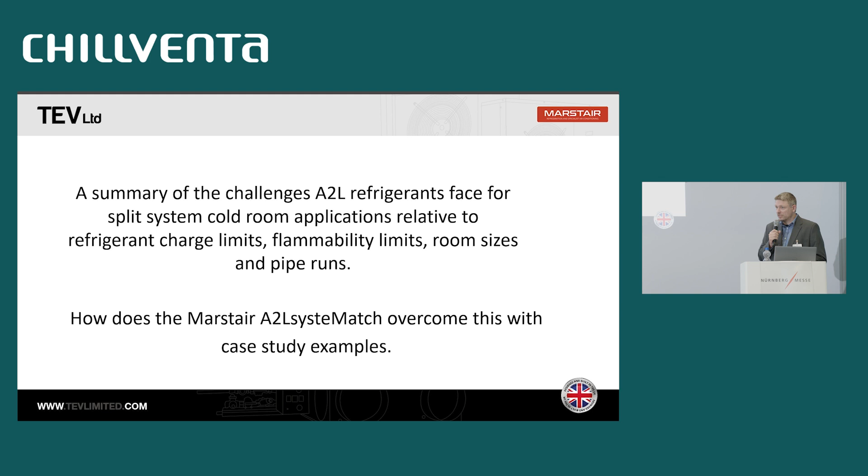Okay, so I'm going to do a bit on the F-gas regulation really quick. I'm just going to flash through it because I'm sure you're all aware of it now, but just to give a bit of background. A bit on EN 378, which is what we've used in terms of our products and safety relative to the A2Ls. What our product is and the development of it. Some case studies. A bit of total cost of ownership with environmental benefits, and a bit about our software that we have available as well.

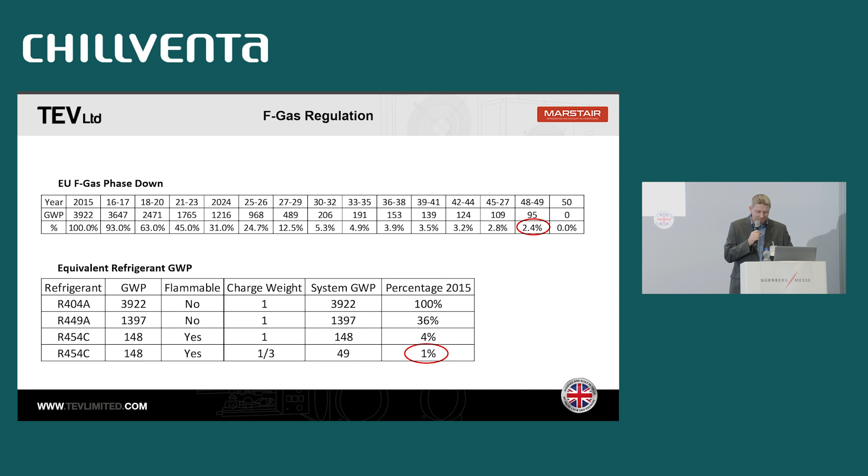Right, so the next slide is fairly complicated, so you're going to have to bear with me, okay? So what we have here is a snapshot of EN 378. And on the far left-hand side are the options in terms of what you can do for the charge limits for different refrigerants. And at the top, we can see number 1, which is charge table C2, which I'll come on to in a minute.

We've also got the second option, which is to do with sealed systems, which I'm going to talk about in a moment. We then have number 3, which is for refrigeration systems class 2 and 3, which doesn't apply to A2Ls. And then obviously we've got the 150 grams, which is kind of what you have in your domestic refrigerator, to do with the R290 that you have in there.

Now, what these caps are talking about in section 2 that I've highlighted in red is really the equivalent energy of 150 grams of R290 hydrocarbon. So it does a calculation based on what the LFL is of the individual refrigerants. So on here, we've got an example using this equation, which is M1 times 4 times the LFL, which I've highlighted.

And for 455A, that calculation comes at about 2.58 kilos. So what it's saying there is about 2.58 kilos is equivalent to about 150 grams of 290. And similar with 454C, that has a slightly lower LFL, it means about 1.7 kilos is equivalent to around about 150 grams of 290 refrigerant.

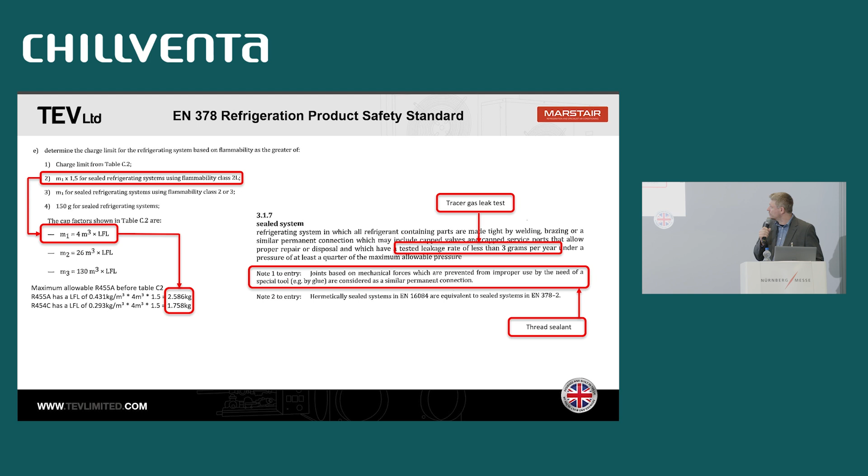Okay, now this is the separate one. This is table C2. And within table C2, if I go across it, we've got different options within EN 378. We've got the flammability class, which is 2L. Then you've got general access, which is into shops. Then you've got supervised access and authorized access. And also you've got these occupational classes. Location type 2 is for split systems. And the rule all the way down is really 20% of the LFL times the room volume.

So once you go above the limit of the 2.5 or 1.7 kilos, and you need to use more than that, that's when you have to start using the calculation in terms of what you're allowed within the room size. Just showing a little calculation on here for our 455A. The equivalent of a 30 cubic meter room. We do 20% of the LFL times 30 cubic meters. Surprisingly enough, it's exactly the same. It's 2.586 kilos. So once you go above a 30 cubic meter room, you're allowed to have more refrigerant than the 2.58.

So there's also a maximum cap. I've just taken here one of the examples, which I think is just general access. On our 455A, the 16.8 kilos is the overall maximum for general access, but you're allowed more on the authorized access. And there are other methods beyond this as well that you can use. But this is kind of the easiest method to use, so will be most generally used.

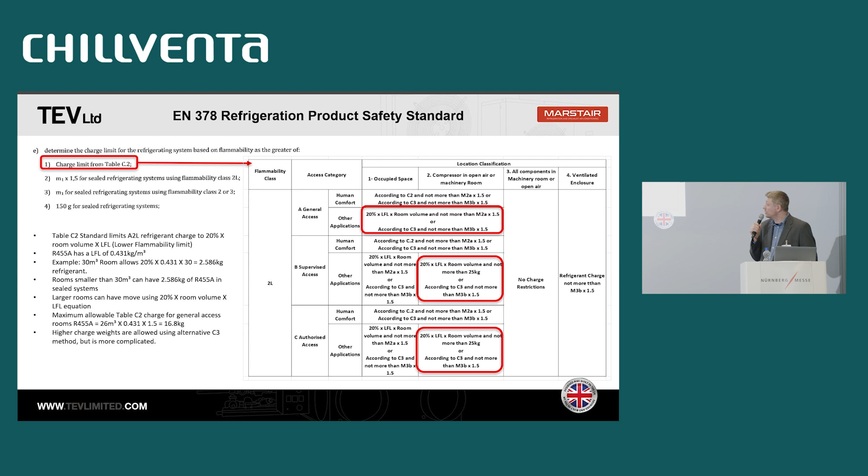Now, even saying that, if we look at the 2.5 kilos or the 1.7 kilos, it's still not a massive amount of refrigerant. Generally, if you have a split cold room system, you're generally using maybe 2-3 kilos anyway, because you'll have a receiver in the system. So how does having these caps at this level help us? And this is where we brought the SysteMatch to be an option for us. Okay, so what is the SysteMatch?

Well, basically, we're running a cold room system, but we run it very similar to an air conditioning system. So instead of having a big receiver in the system, we put a small receiver in the system. We move the expansion valve, and we put an electronic valve in the condensing unit, which means the interconnecting line becomes an expansion line like you would have in air conditioning. And then the suction line goes back as normal. We have a microchannel condenser, and in the evaporators, we try to have as small tubes as possible, again, to reduce the refrigerant charge. If we do this, you drastically reduce the amount of refrigerant.

We've got various options within the system. We do cold rooms, freezer rooms. In the UK, cellar cooling is quite popular as well for cooling beer. And it allows us to get the charge down below, in a lot of cases, these 2.5, 1.7 limits, and enables you to switch over to A2Ls very, very easily without any of the hassle that you might have thought you would have had. Obviously, compared to CO2, which you could go to as an alternative to the 448, the skill uplift is a lot easier.

And from a cost point of view relative to CO2, the energy costs and also the actual equipment costs for small systems are obviously a lot more expensive, whereas this is a much simpler, easy rollover from your current 448, 449 over to the A2Ls.

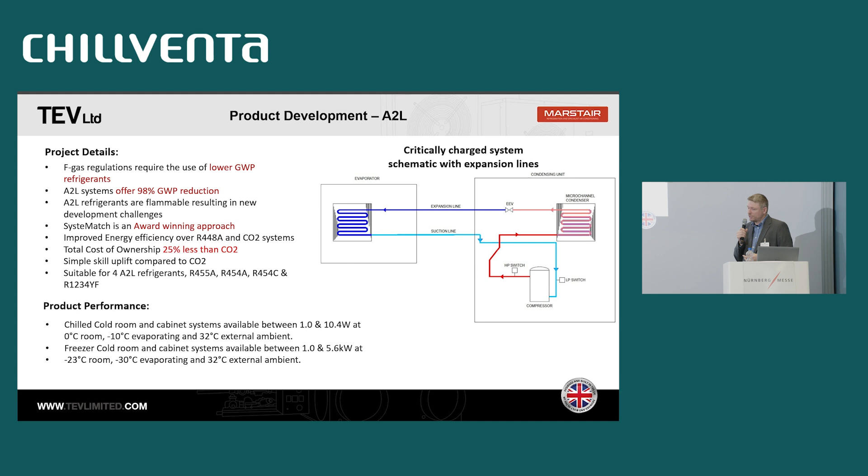Okay. So there are different types of refrigerant out there. Obviously, you've got the two Chemours ones, which are your 454A and your 454C, and you've got your 455. Your 454A is very good in terms of capacity, has a slightly higher GWP and a slightly lower LFL. Your 454C sort of gets you back under the 150. The 455 has a much better LFL, but also has quite a high glide.

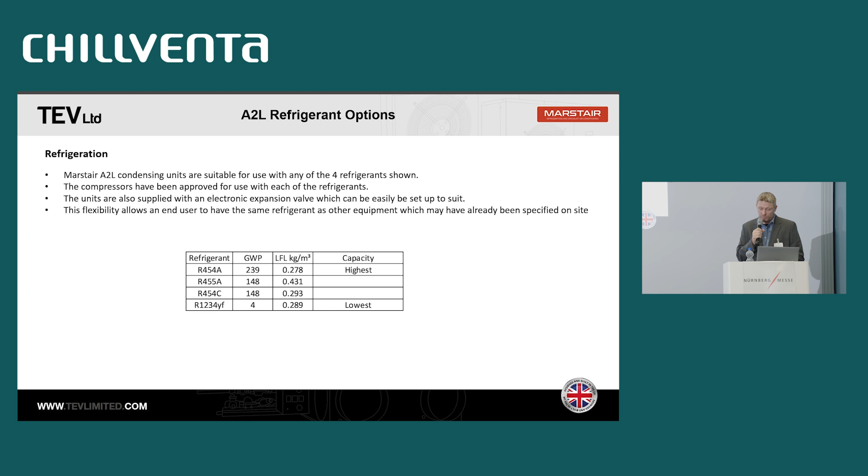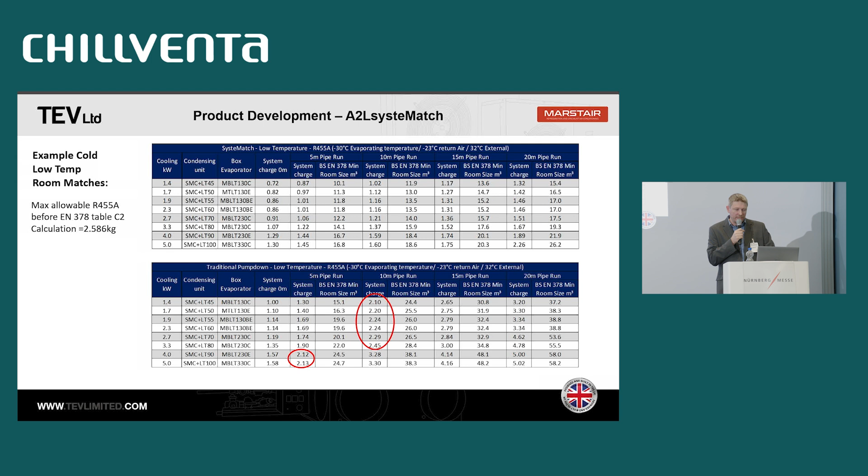Okay. So that's our cold room solution. We also offer systems that you can actually match one-to-one with cabinets as well. So I was on the wrong slide there. So yes, this is an option here, just showing what we might be able to do in terms of matching with cabinets. You can do exactly the same thing. Take our SysteMatch condensing unit with the electronic valve, program it to the refrigerant type that you want, and match it directly one-to-one with a cabinet. And generally, although the evaporators in the cabinets are a bit bigger, you still reduce the refrigerant charge significantly through the expansion line method.

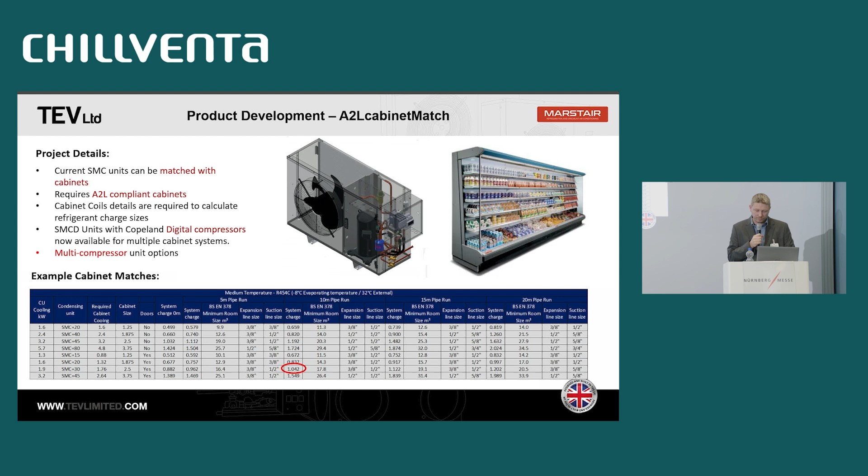Like I said, big in the UK is cellar cooling. And here's an example where we've got a 10-meter cellar cooler doing about 2.7 kilowatts, and the actual charge requirement is only 480 grams. So it keeps the charge sizes down to an absolute minimum.

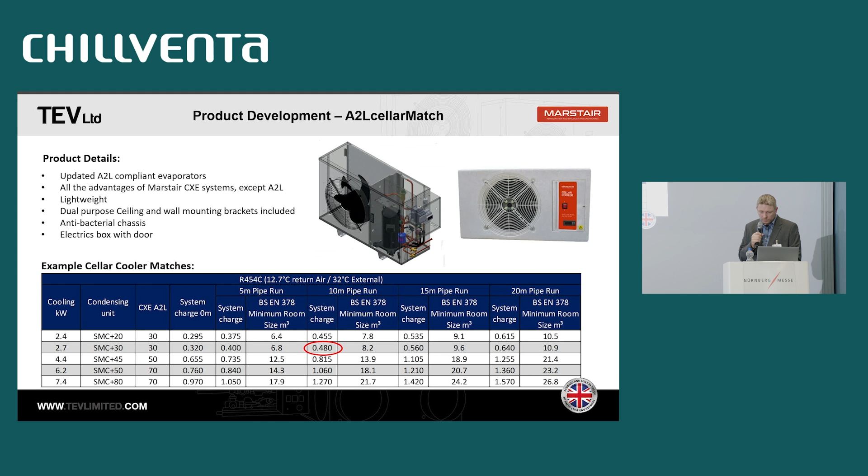So some examples of some case studies. So this is a Central England Co-op in the UK. We did 4 cold rooms. There were 3 medium temperature cold rooms and 1 low temperature cold room. And the overall charge that was required across all those 4 cold rooms was only 3.2 kilos, which we were quite happy with.

I mean, to be fair, they were quite short pipe runs, but in any case, it made it very easy for them to apply it, because they knew the amount of refrigerant was below the amount equivalent to 150 grams of hydrocarbon. And also, if it all leaked into the space, you couldn't possibly create a flammable atmosphere because there was just so little of the refrigerant being used.

And then when you do a comparison relative to CO2 for these small systems, the capital cost is significantly less than if you're going to use a CO2 condensing unit, and the energy usage is significantly less as well. So overall, from an annual emissions point of view, it's actually greener, in that the amount of GWP in the refrigerant is extremely low because you're using so little of it. But then also, because of the total cost of ownership, the cost of running it, and the cost of buying it and installing it in the first place, with the skills and everything else you need, there's a significant saving in using A2L relative to CO2.

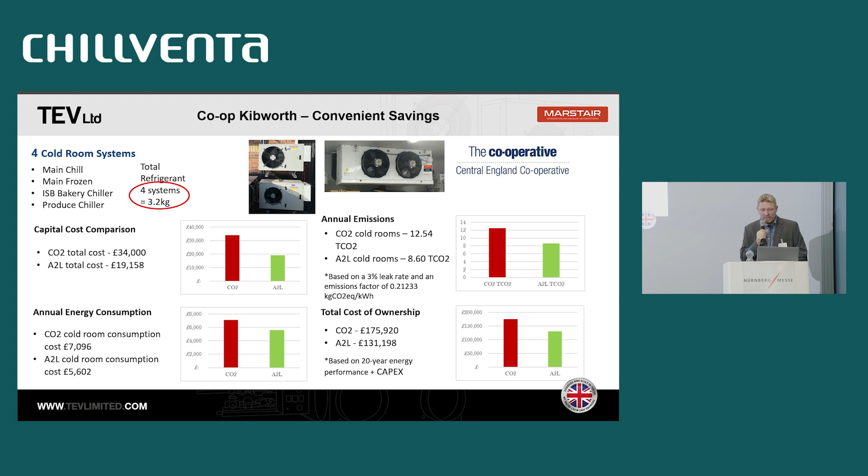This was another case study that we've got. To be fair, it was quite a small cold room that we did, but this one was only on 380 grams. Generally, anybody who's been on the tools and actually installed cold room systems knows you're looking at maybe at least 3-4 kilos on a cold room system. But by getting the charge size down equivalent to air conditioning, it's a lot less. Everything else in terms of the savings is relative to the previous slide.

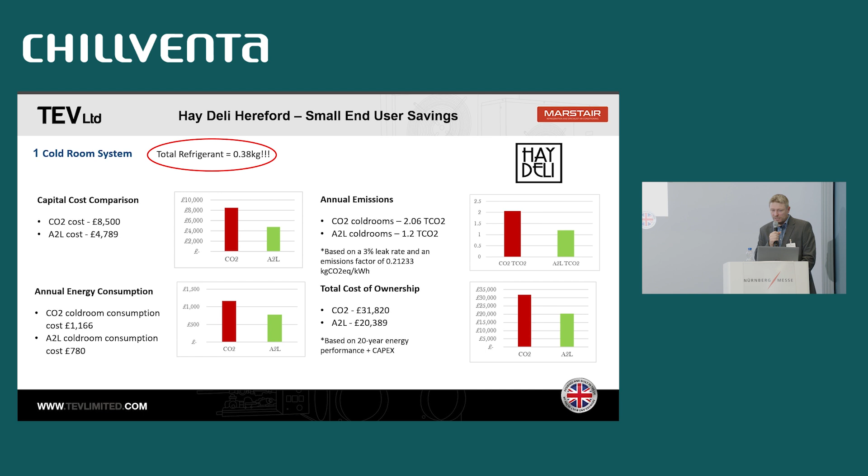So we've had a few customer testimonials. I'm not going to read these out, but it's been trialled in various places within the UK. Asda is a big one, which used to be owned by Walmart. They've got a series of our cold room systems installed. Central England Co-op also have a number of our systems installed, and they're very happy with it. And the Hay Deli. So we've got big supermarkets, convenience store chains, and the small independents, all very happy with what we've offered.

We got Omega, a consultancy in the UK, to do a comparison for us on cost of ownership. You get a bit of energy saving using the A2Ls, but the initial cost is a little bit more on the A2Ls. Over the total cost of ownership, you end up about the same. But for small systems, relative to CO2, integrals, or secondary glycol systems, because of the energy usage or the cost, the total cost of ownership ends up being more.

But if you take environmental and emissions, because of the emissions of 448 and 449 with a general leakage rate, the A2Ls are clearly better. From the energy point of view, with the amount of carbon currently required to create energy, when we end up with a fully carbon neutral energy system the figures will change. But right at this time, the A2Ls are actually a better environmental option, and certainly better than air-cooled integrals or secondary glycol systems.

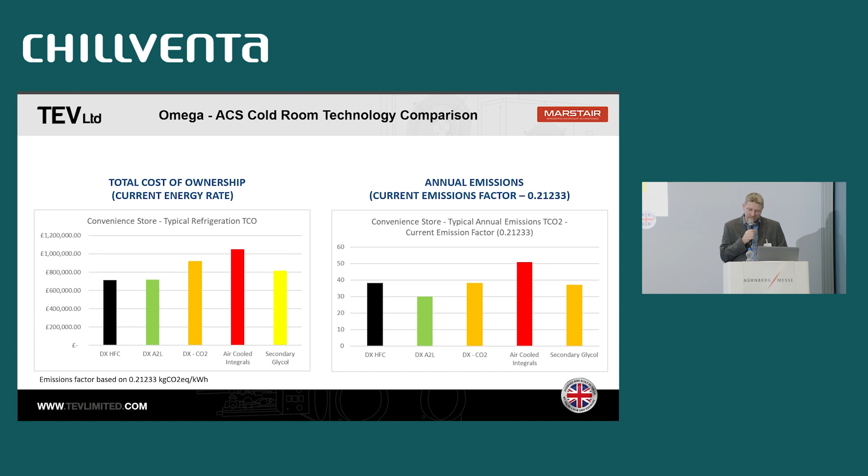Okay, in terms of where we are now, these are a couple of pictures of some of the equipment we had installed in Asda. We also have a selection tool where, if you put in your room size and the kilowatts you want, it will do a selection of a matched set of our indoor and outdoor units. That's available online to have a look at.

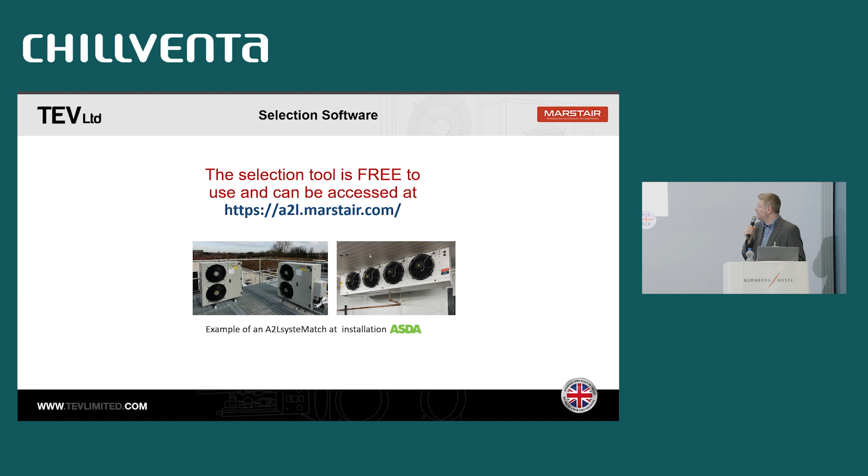Also in the UK, we've won a number of awards over the past few years for the different types of A2L equipment we've offered, whether for cellar cooling, matching with cabinets, or cold room systems. Okay, and that's basically everything.